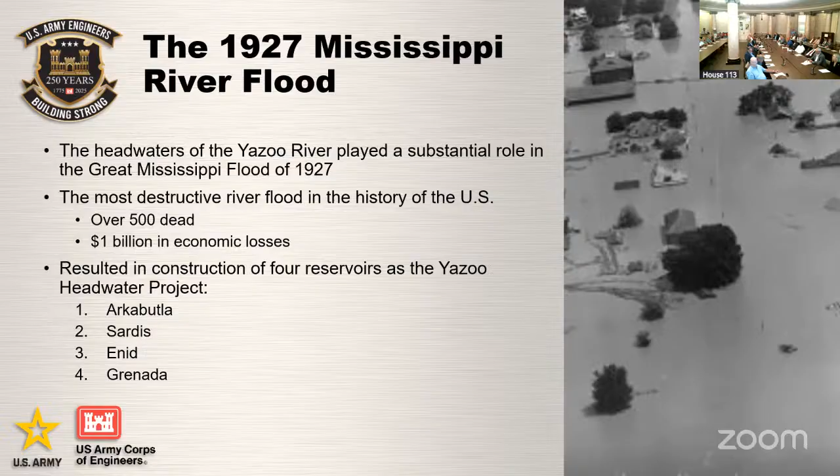They join up and go down to where the Yalobusha River carries water from Grenada. It meets the Little Tallahatchie River and it forms the Yazoo River just above Greenwood. So then the Yazoo River goes around Greenwood, around Yazoo City, and down, and drains into the Mississippi River right at Vicksburg. So that's how the water drains from the four Mississippi lakes and makes its way to the Mississippi River.

The Yazoo backwater is separated from that by the Yazoo Backwater Levee, Will Whittington Levee, and a few other levees that protect it. Primarily we have two rivers. You have the Sunflower River and the Steele Bayou. They drain to the south to the Yazoo Backwater Levee. We have two gravity structures there, Little Sunflower structure and Steele Bayou structure.

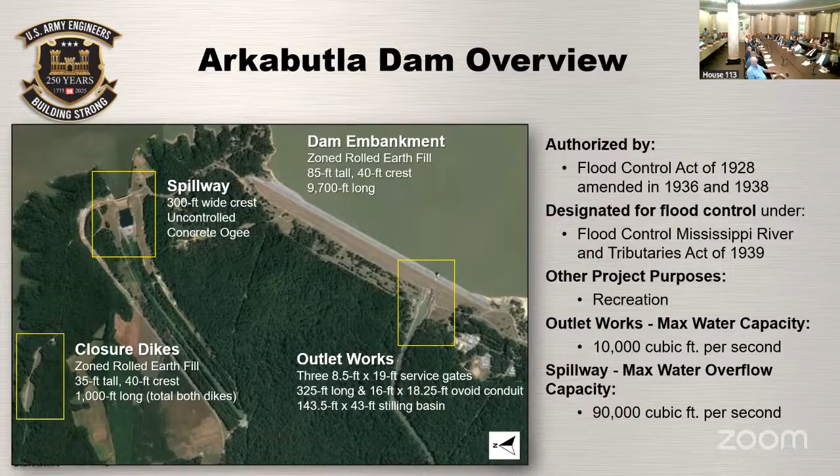All water that's gone out of Arkabutla in the last 6 years has gone through the outlet works structure. And again, since 2023, we've let no more than 4,500 out downstream. So just a quick overview of the dam, how we operate it, how it works. And I'm going to turn it over to Noah Vroman to talk more about the dam safety emergency.

All right, thanks, Corey. All right, I'm Noah Vroman with the Corps of Engineers. So I'm going to talk to you a little bit about the dam safety issues that we're having with Arkabutla and then what we've done to date to mitigate those issues.

So in May of 2023, a sinkhole was discovered at the dam. You can see the sinkhole in the left picture. There's an arrow pointing. It's just right above the outlet of the outlet works. So the dam, as Corey mentioned, we have two ways to pass water. One is through a conduit, with 3 gates on it. That's what we primarily use. This sinkhole is located right above that conduit at the downstream end, or the downstream toe of the dam.

So sometimes we do find depressions in dams. It's not uncommon, so we just want to make sure what's causing that depression. So in the case of Arkabutla, we ruled out and did an investigation to ensure where that material had gone. We had lost material somewhere due to some reason.

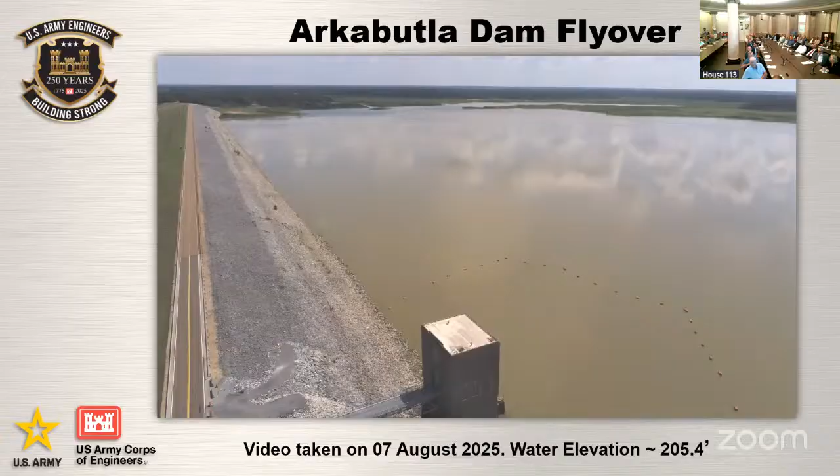So you can see here what the conditions look like at the project right now, if you're not familiar with the dam. The drone's going to pan to the left. You can see the riprap here, looking on the upstream side of the dam, and you can see the two different colors of riprap - the lighter color is generally where the pool has typically sat over time. And this is looking downstream.

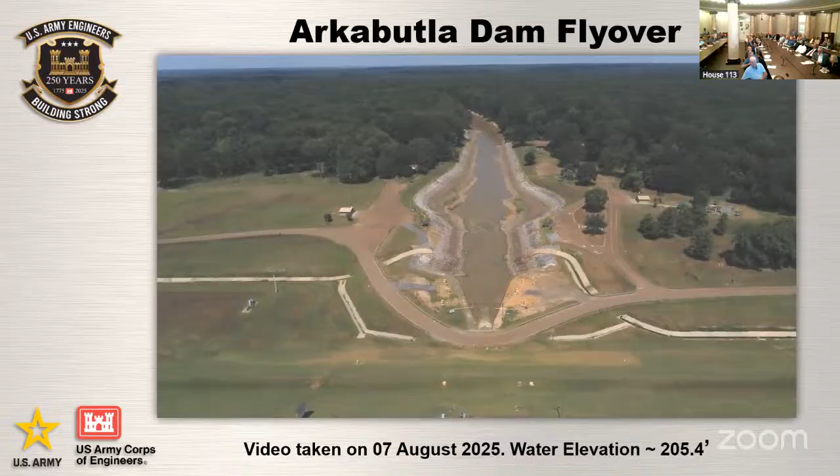So I'm going to talk about this, obviously a serious issue. We had an ongoing failure of the dam. We did issue a breach emergency warning at that time, and we coordinated with MEMA to get that information out. Obviously public safety is our first priority, so we needed a rapid response to this issue. We call this, in the Corps of Engineers and Dam Safety, interim risk reduction measures - this is our direct response to mitigate the danger posed by the dam.

Initially, that sinkhole was discovered in May of 2023. From 2023 to 2024, we mitigated the loss of material coming out from under the dam by installing relief wells that can safely capture seepage occurring along the conduit and under the dam, and then plugging the drains in the Stilling Basin where all the material was coming out. We basically stopped the movement of material from the dam, and we were able to safely manage the seepage pressures.

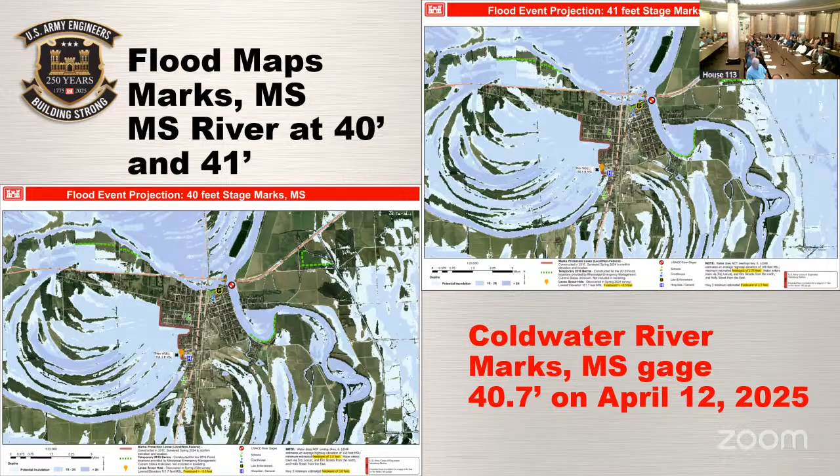We're able to provide this information to help communities make informed decisions about how to mitigate these impacts. This kind of leads us to our increased stakeholder engagement. Obviously, transparency and communication is important for us to share information about things that are ongoing.

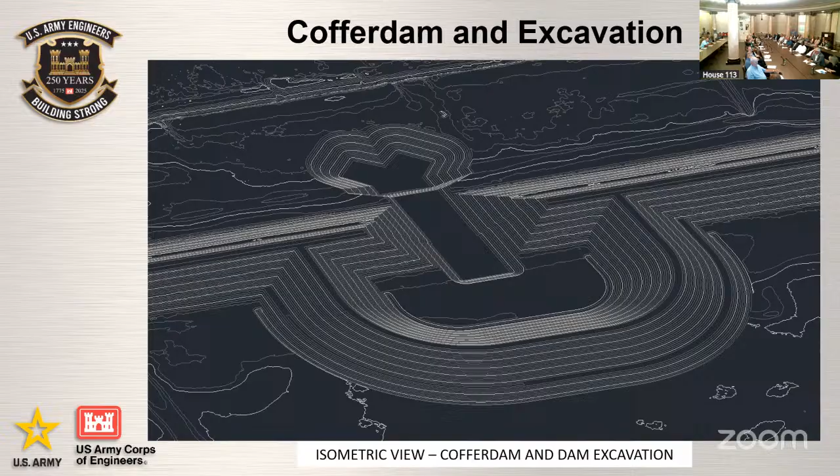That kind of goes right into the next slide. The team is also designing a new conduit. If we were to design Arkabutla today, we wouldn't have done that egg-shaped conduit - there are some issues with water stops, some construction flaws in what's out there today. So this will be a more efficient design, and the team continues to refine the shapes and diameters and how we're going to move the water out.

We're also looking for efficiencies in how we're doing things. While designing this, we're also looking at other similar dams across the country that convey similar amounts of water, trying to see if there's a design already in service that's working really well that we can apply at Arkabutla. A lot of stuff ongoing, but we continue to work on it and are consistently looking for efficiencies to help move that timeline up.

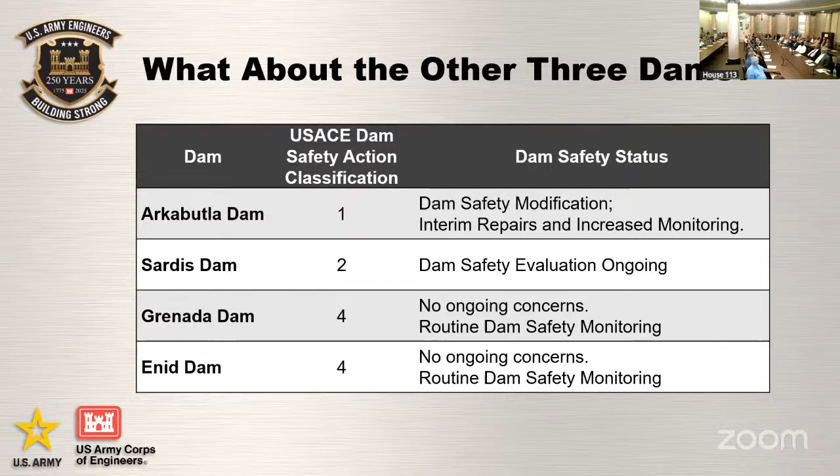Yes, sir. Okay, last slide. So we made it to the end. So I appreciate everybody hanging in there. And then we'll take a whole bunch of questions or stay as long as we need.

3 takeaways. Protecting our communities is our priority, and it's our professional duty. That's what we're here to do, and that's what your Corps of Engineers is doing today. Preparation is public service in action. This committee has an integral part of that. State agencies have an integral part of that, as well as the Corps and other federal agencies. We are all singularly focused on protecting lives and property and the environment.

And lastly, this is more than just a project to us. It's a partnership. The same folks that live around the lake and recreate at the lake likely wear Corps of Engineers badges too. So the people who work in the Vicksburg district are your neighbors. They have grown up in your same communities. They've gone to your same colleges and schools and churches. We are in this together. This is a partnership, and we need it to find the solution so that everyone can benefit. And with that, sir, thanks for your time for allowing us to update you on Arkabutla.

Guys, I appreciate that very much. I imagine there's going to be quite a few questions. I'm going to start us off, and gentlemen, I promise I'll get to you quickly. A lot of people don't dispute there's a problem. Colonel, we know there's a problem. That's obvious. But we're interested to learn more about the fix. Y'all talked about that some today, and the most glaring comments we hear are about the time frame. So I'm just going to ask you that right out of the gate. Talk to us more about the time frame.

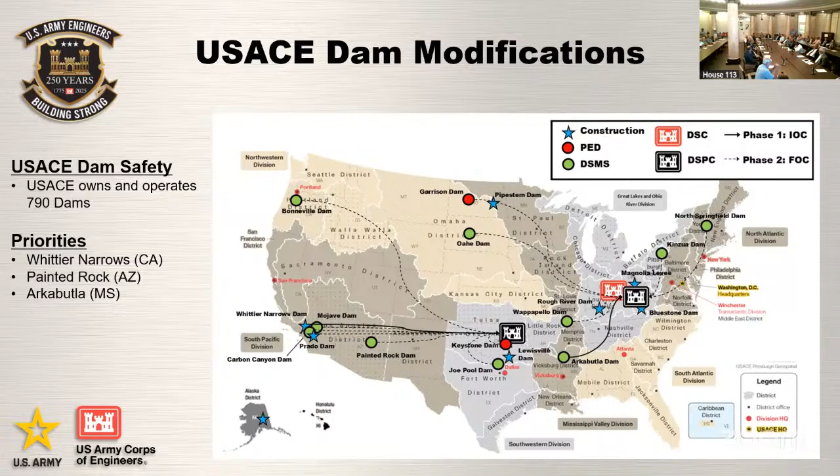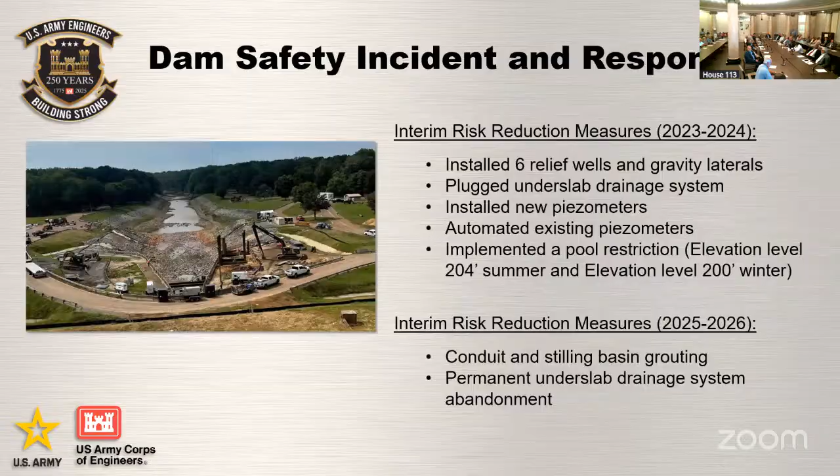In a previous chart, you'd seen where we're accepting risk levels up to 215 feet. This coming spring pool, we feel with great confidence that we're going to be able to accept 220-foot pool elevations before we have to do 24-hour monitoring. We will stay aligned with the Mississippi Emergency Management Agency.

I think there's a broader conversation that this collective body and our state and federal agencies could have about emergency preparedness measures, specifically around Marks, Mississippi, working with the local levee boards and emergency managers. We had a good repetition last year, but I think we're going to have to continue to do those things in the coming years until we can put the dam back into its full operational capacity after construction.

No, sir, I think you actually hit the nail right on the head. So in 2023, when we discovered this, we had a significant issue. What we were seeing there was very significant. And that is why we continue to keep the pool level very low, to keep down the energy that the head puts on the dam.

If we draw that down, it loses the ability to move that material, right? And then we have the additional interim risk reduction measures, the wells, the monitoring, and the phase 2, which is the part Noah discussed earlier, which is the grouting of the voids. So we're actually gonna pump grout into the dam to seal the voids that have been created by the erosion.

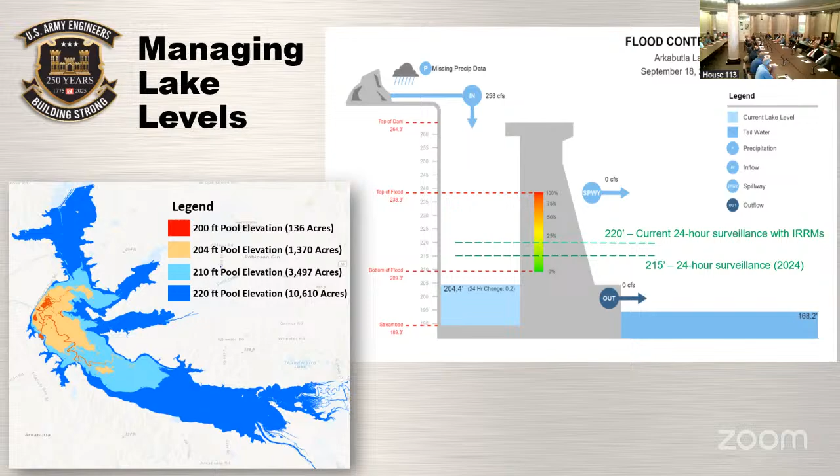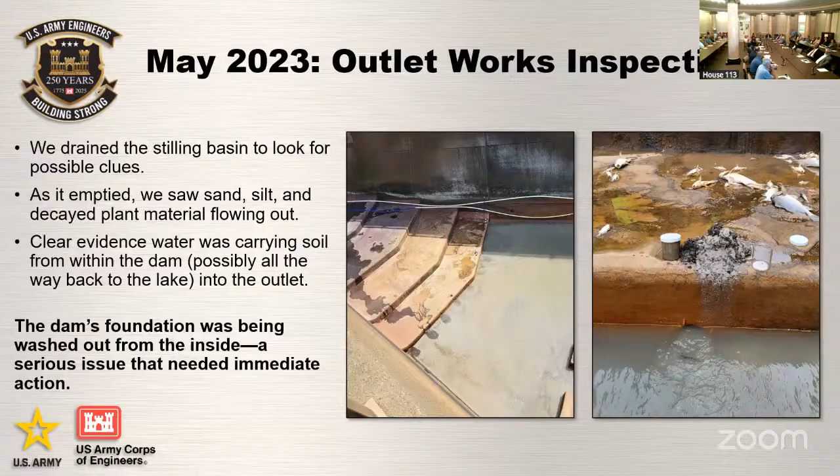Am I reading this, and these are my words, so you tell me if I'm wrong, but 794 total dams that the Corps is responsible for nationwide? Was that your number? Yeah, roughly 790. Roughly 790. And the way I read your slide was that the Arkabutla Dam is in the top three of seriousness for repair nationwide. Is that correct? Yeah, that's correct. The three DSAC 1s, we talked about the DSAC rating. The three DSAC 1s are Whittier Narrows in Los Angeles, California, Painted Rock out in Arizona, and then Arkabutla.

All right. Follow-up question to what you mentioned a minute ago, Colonel. I think the word you used was we put several Band-Aids on this issue. Are you talking about since the discovery of the sinkhole in '23, or have y'all been putting Band-Aids on this dam for a while prior to that? You want to address that? Because I'm just going to say, we've been putting Band-Aids on this since the 40s. So since it was built? Correct.

So as soon as we put the dam into operation in 1943, the engineers, the folks on site, we had issues with the outlet works, with the dam, and we've been trying to mitigate those issues by grouting and other measures since then. And obviously they haven't worked, with the sinkhole development that showed up in 2023. You know, the thing about a dam is, if you think about it, it's always loaded. And so if there's any weakness in the dam, the water will find a way.

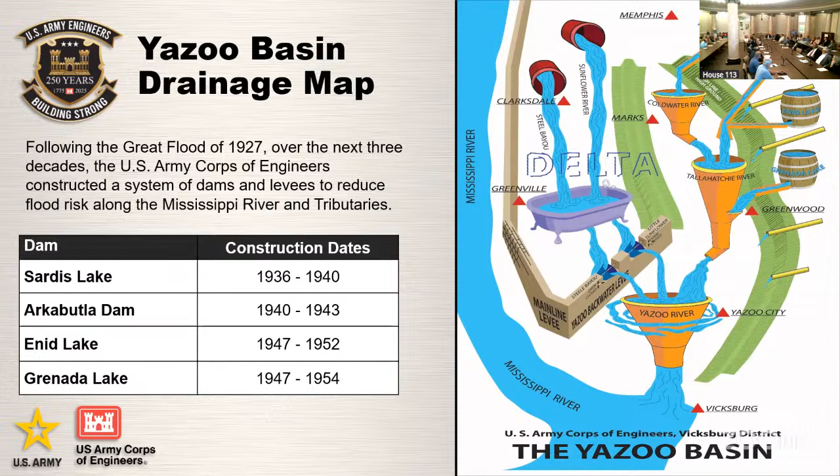And it's continuously 24 hours a day, 7 days a week, attacking that dam. So it's going to expose every flaw or weakness that dam has. So that dam, when it was originally built, it's sitting on sand, and it's supposed to have water stops. Basically, the conduit was poured in sections of concrete, and those sections have a joint, and there's supposed to be a water stop that stops water from coming into that joint.

And that dam in the 1940s was not built that way, so it was a construction defect. None of the other three lakes have this defect. Arkabutla is the one that does have this defect. And so with that dam constantly loaded for 80 years, water is going to find a way, and it has. And we've tried our best to utilize what we have, but really this requires a full repair of the outlet works, not a Band-Aid fix.

What was the distinction with the Arkabutla Dam that caused this basically ongoing problem for 80-plus years that the other dams did not have? Was it designed differently, or what was the distinction there? The distinction was in the plans and specs. In the original design, it was supposed to have water stops, and somewhere during construction, water stops were taken out of the plans, and they were never built. So that's the key distinction for Arkabutla: it was a construction defect that was not caught during construction, that was exposed after the dam was put into service.

Wow. First time I've ever heard that. All right, I think Senator Whaley has some questions. I'm gonna turn it over to him at this time. Thank you, Mr. Chairman, for holding this committee hearing and also for allowing a senator to sit in and participate. Thank you all from the Corps for coming in and answering some of these questions.

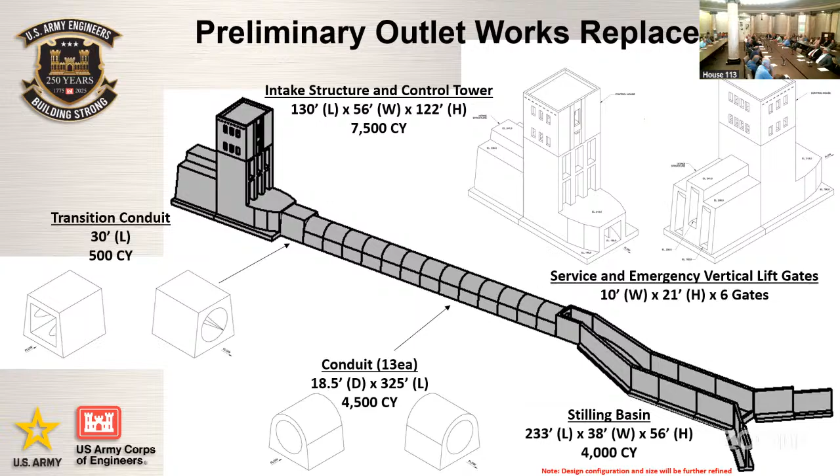What was the total dollar figure that you estimated for the dam itself? Approximately 800, was it 800 million? Yeah, this is about a 10% level of design at this point, so we're going to take the next several months to mature this number. But right now, the initial number that we've started to have a conversation with Congress about for total construction throughout the entire thing is about $830 million. Does that include any dredging of the lake, doing away with the trees, or is this strictly the dam, the structure itself? No, the dredging that's being discussed, the tree cleanouts and things like that, is not in scope currently within that number.

It is not in this number. Do we have a ballpark number if that was going to happen, what that might be? I don't believe we've looked at that scope of work, so I do not have a ballpark number, no.

Have we looked at the crystal ball in the future, and will those go away? Are we going to leave them in the lake as they stand? No, we know that we need to address the smaller growth that is growing in the lake, because that additional vegetation and tree structure will cause further problems for years to come. So we know that the willows need to go. Now, how we do that, we need to evaluate. I've seen on Facebook pages and things like that, let's just spray it. Well, I've got concern with the environmental impacts of some of those things. So I'm sure others will find a safe way, but we've got to make sure that we remain environmentally acceptable, because of the recreational and environmental benefits of the lake.